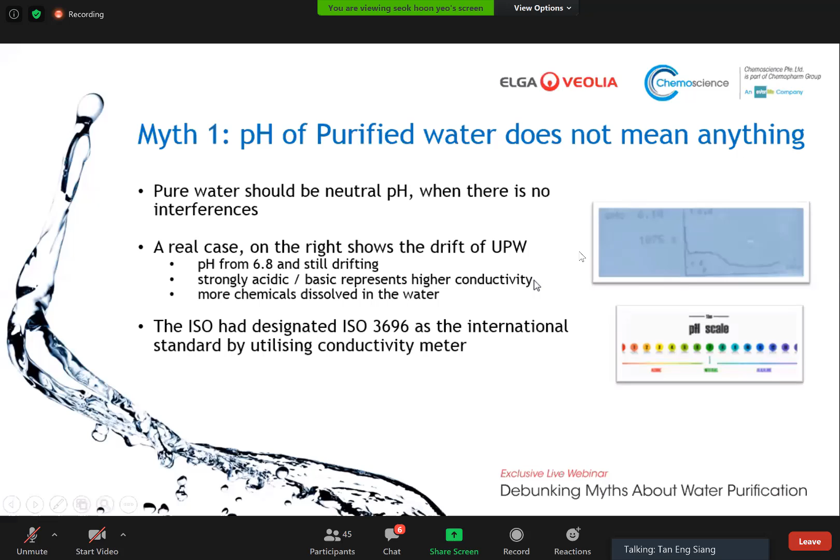I would not say right or wrong, but it's not an appropriate way to determine the purity of your precious water. In fact, look at the ISO. ISO has designated ISO 3696 as the international standard, using a conductivity meter as a form of measuring inorganics. If a pH meter were the way to determine pure water, then all the water manufacturers would have incorporated this mechanism into the purifier, but that is not so.

So you can still use a pH meter just as a very crude screening of your water, but most likely you will not get a neutral 7, because that is a theoretical number. It's just my experience which I want to share with you. But if you want to go into the details of how a pH meter works, you can check on the internet. There are tons of information there, and it tells you why measuring the pH of pure water is such a challenge.

If you are still not sure of your water system performance, you can invest in an online resistivity meter, but that is going to cost you a bomb, because inline resistivity meters are in the price range of thousands of Sing dollars. Another value-added way is to engage a qualified service provider, from whichever water system you purchased, to provide periodic maintenance and calibration service to ensure that whatever you see on the indicator of your purifier is true.

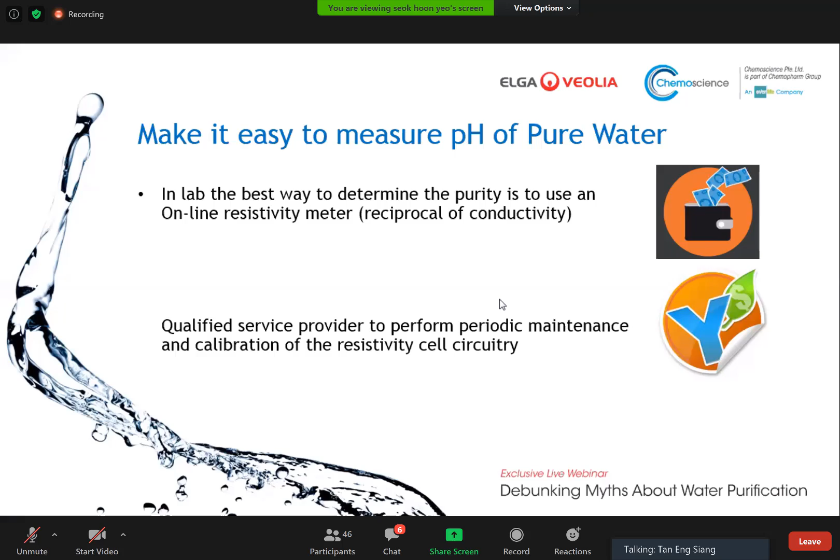Okay, I think I can pass it to my colleague for the next slides. Can you all hear me better? Yeah, no problem. Okay, pardon me just now for doing the first opening slide. Thank you, Mr. Tan, for explaining on the pH.

Next we'll be moving on to conductivity versus resistivity. As you know, some companies prefer values in microsiemens, or maybe they prefer megaohms. Some water systems can be set to these two values, but in the end, it's about what water purity and quality you want on display.

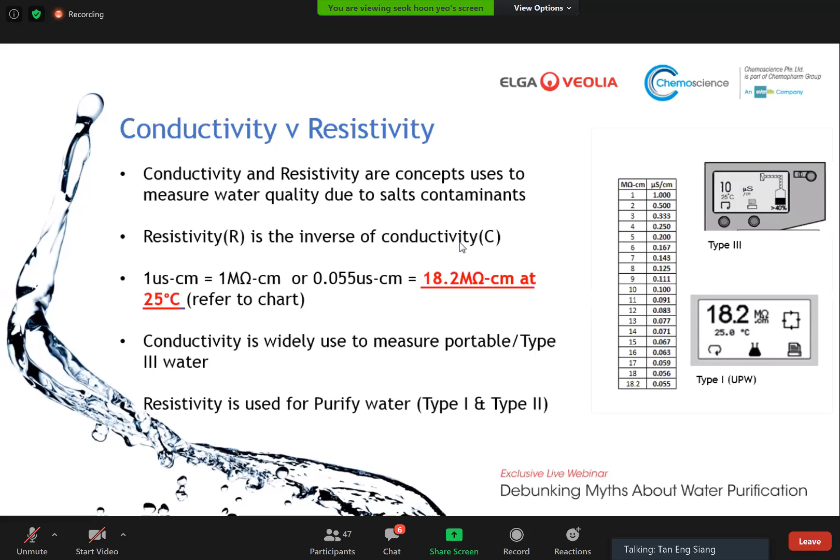There are some, probably including our salesmen, who will say, oh, my system can provide 19 megaohm, 20 megaohm. You see, resistivity is talking about how much electricity is able to pass through from point A to point B. So therefore, when you're talking about ions, ion mobility is a function of temperature. A rise in temperature means more mobility of the ions, which translates into lower resistance. With a higher temperature, you will have a drop in the resistivity reading.

And when there is a drop, if your water is not compensated to 25, you would think that your water quality has dropped. But in fact, it's actually due to the relationship with temperature. Likewise, if the temperature falls, you will have a rise in resistivity because the mobility of the ions is reduced and the resistance increases. So you have to know this relationship to understand why, when you're reading your water resistivity, you need to compensate it at 25 degrees.

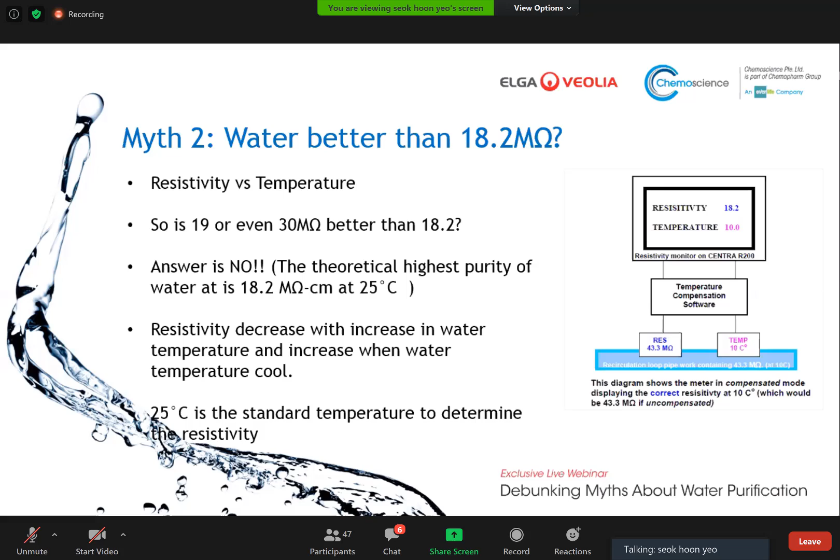So let's go to the next slide. And Fazli, over to you.

Okay. Now we move on to this myth 3, about bacteria. This is very sensitive for those labs, for example, those doing bacteria culture, when they run this in a diagnostic lab which is linked to an analyzer. Some might think they have this growth. When they do collection for sampling tests or micro tests, they found this bacterial growth.

So there are a few factors causing this. It could be from the filters block. It could be from the lab. So many factors may arise in the system. So for us as engineers, normally we need to eliminate them one by one. Where is the collision point? How does this bacteria grow?

But you see that this UV lamp has been used in two ways in water, which is to control the count. Mainly, it doesn't really kill the bacteria, but it tries to prevent replication and growth in the system throughout this inline process. So ELGA also adopted this flowing water, which is inline, which Mr. Tan already mentioned in the previous slide. So this offers much more substantial and effective control of bacteria. So there are a few functions by which we can eliminate and kill the bacteria.

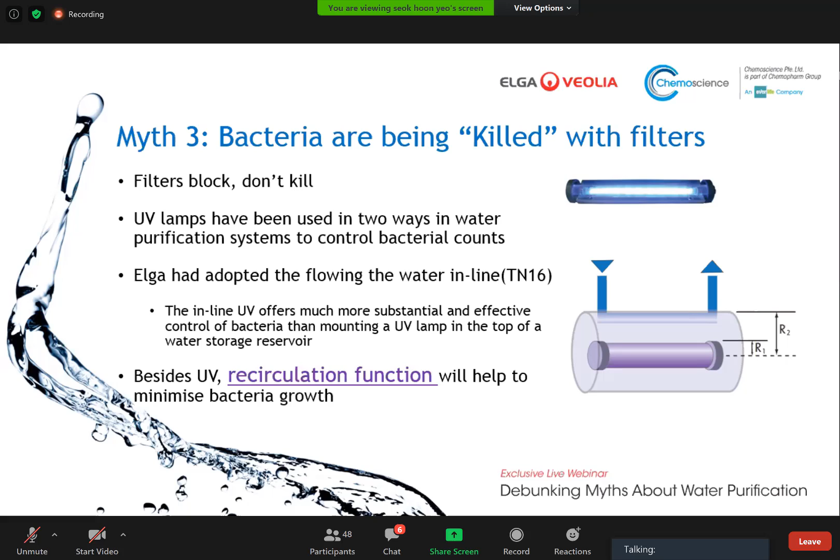All right. An interesting subject, because when I promote my water system, sometimes customers say that they don't need to have the TOC monitor in the water system. What they do is collect the water, and then as a random test, they test it with their lab TOC monitor. So I want to hear from the engineer, because this happened to us in some of our discussions with customers. So maybe Mr. Tan, would you like to share with us how this offline TOC works, and is it really applicable to ensure the purity of the water? Okay, thanks, Seok Hoon.

Okay, you may have asked me this question if you have listened carefully: resistivity, I thought you just told me that 18.2 megaohm is the indication of the purity of water. Yes, it is true, you are not wrong. However, resistivity only measures the ionized salts, which are your ions, meaning ion activity. It does not measure your organic contaminants. Organic contaminants are carbon-based solvents, anything that is carbon in nature.

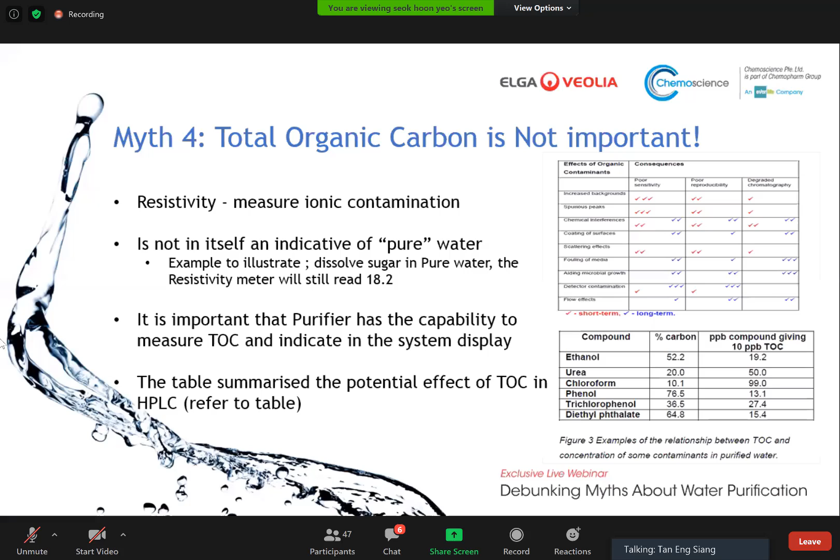And if you know in the market, one TOC instrumentation could cost you about 10 to 15,000. It's really very, very costly. And ELGA is able to provide you with this TOC real time. It's really a very cost-effective way for you to lower down your overhead in your lab operations.

Probably I can just briefly go through how it works. Actually, it makes use of two sensors, one before the UV and one after the UV. So what happened is that this UV is a special UV. It is a double wavelength. One wavelength is used to disrupt the DNA. The other wavelength is used to oxidize the carbon compound in the organic contaminants.

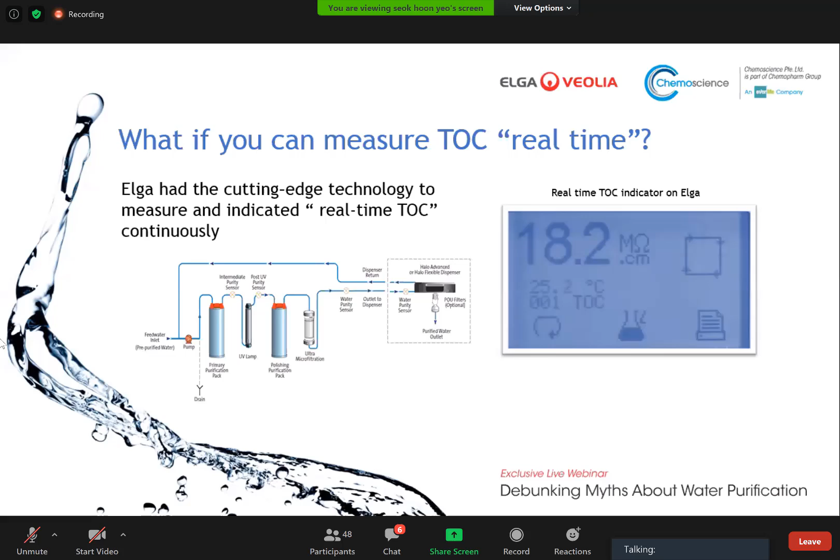Okay, all right. So now endotoxin. I think that this is definitely of great concern for customers who are in the biological arena, doing cell culture related work. So, Fazdly, you have a point of use filter with you, right? So can we have a look? Yes. Cool. Okay. Can we see? Can you see this?

Okay. So I have a question, because it is definitely important, as most customers would use point of use filters as the final, pardon me for my layman term, final cleaning to remove all the endotoxin. And some of the belief in the market, especially when they see the price of some of the filters, customers say, hey, why is it so expensive? I thought all kinds of filters can remove endotoxin. So, how would you share this piece of information with the customer, Mr. Tan?

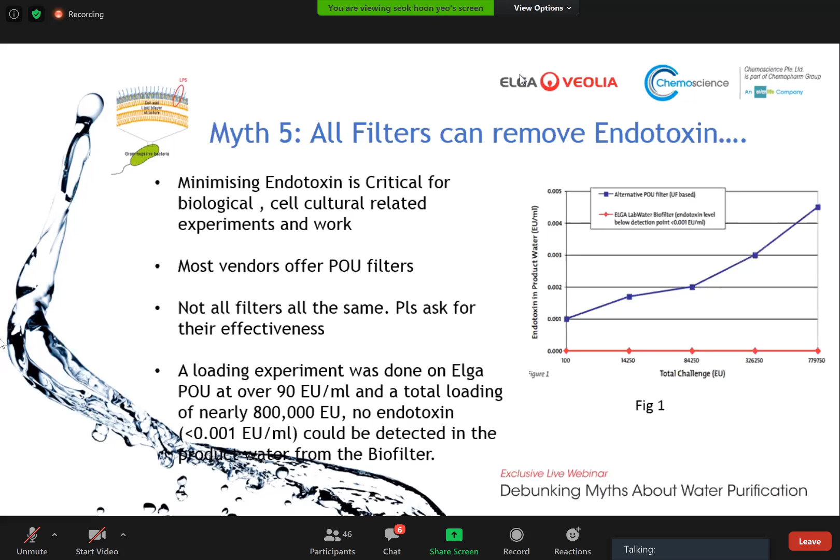Yeah, sure. Okay. All right. So, Fazdly, over to you. Yeah, okay. We move on. All right.

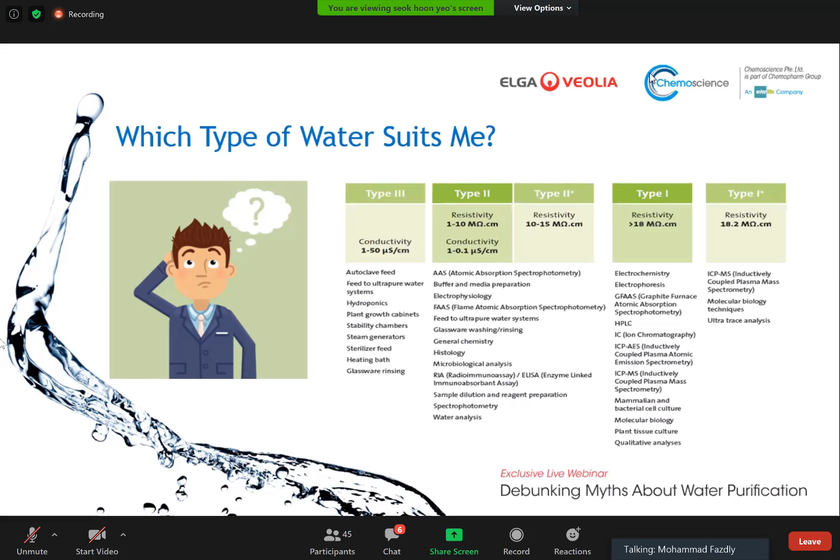Okay, next slide please. So next slide. Yeah. Okay.